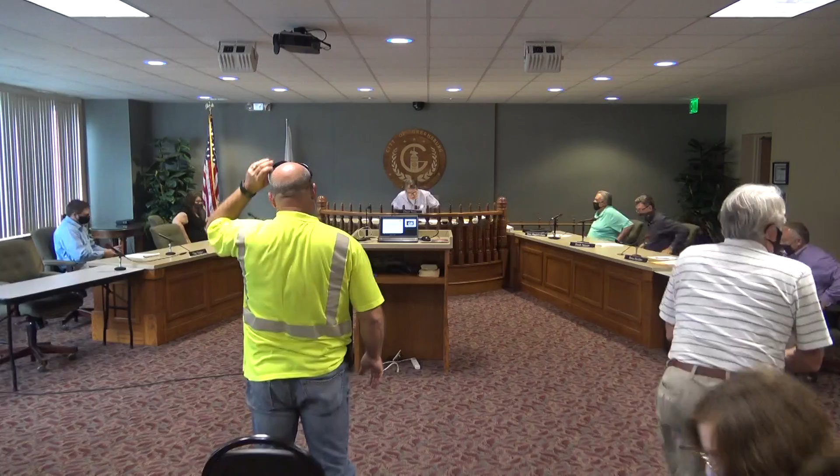I pledge allegiance to the flag of the United States of America and to the republic for which it stands, one nation, under God, indivisible, with liberty and justice for all.

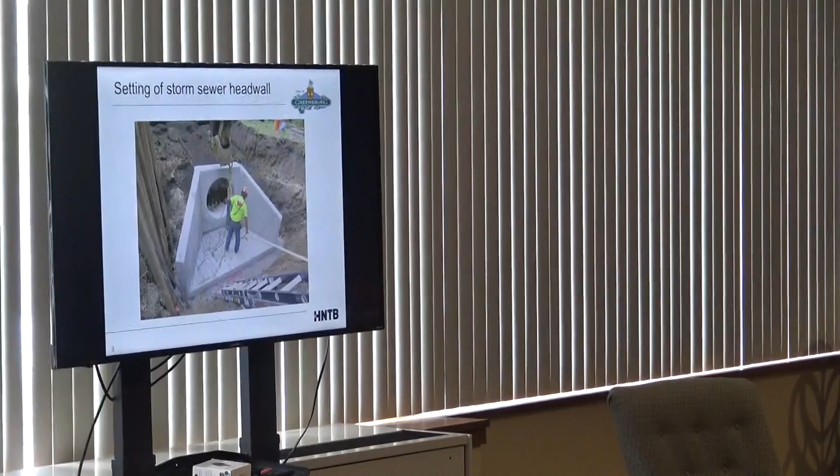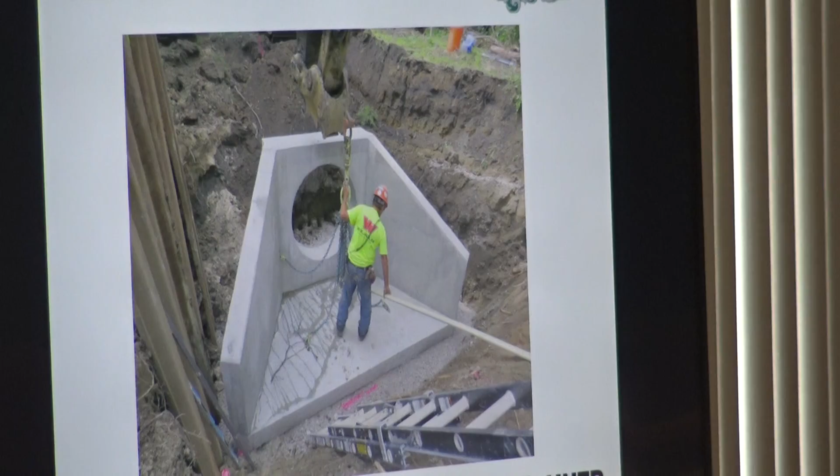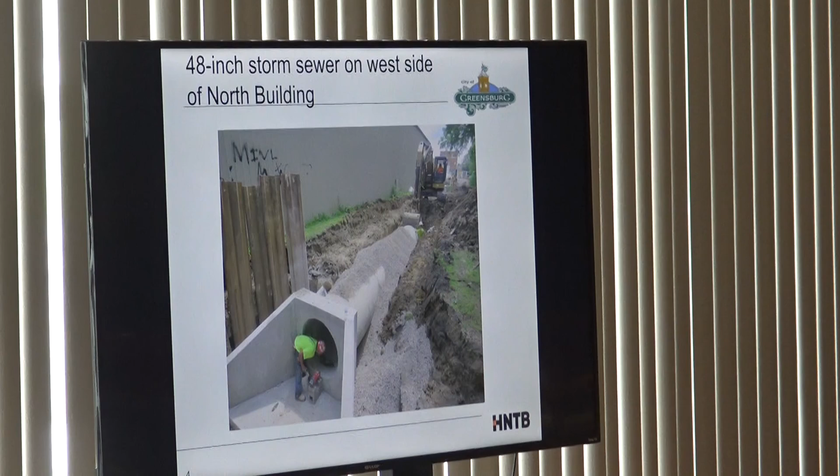Here we are setting the storm sewer head wall on the north side of the north building. You can see to the left some little temporary sheeting they put in to install that. That's a 48-inch sewer they'll be connecting to. Here you can see them laying out that head wall and going south along the west side of the north building.

Here's some more underground piping. This is the air piping connecting the blowers, which are Area 8, to the filters in Area 4. I believe, short of the connections to the water distribution system, this may be one of the last underground process piping jobs they have to do. It's fairly shallow because there's a lot of stuff below it.

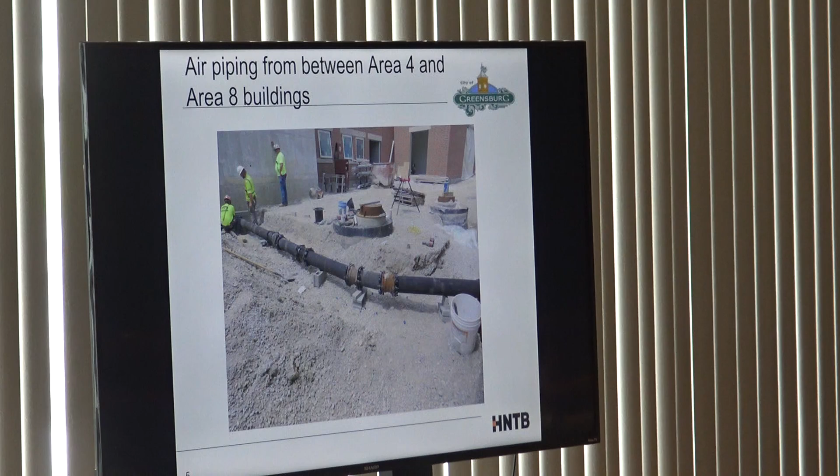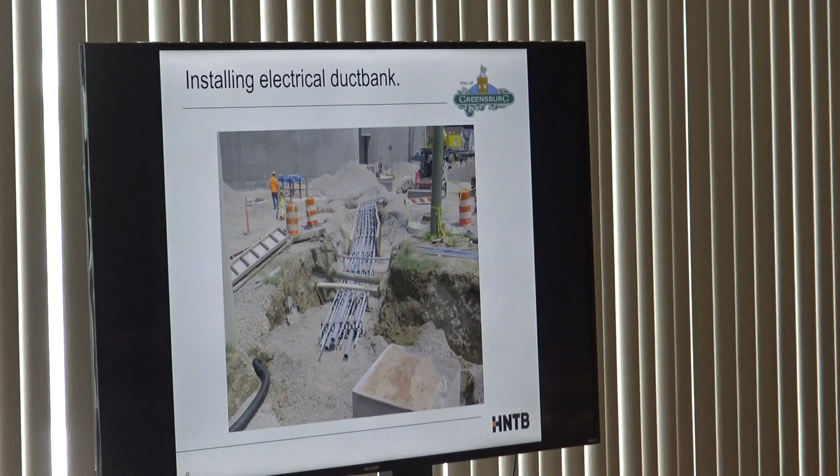Here's another shot of encasing the duct bank with concrete, and you can see the red from a previous pour. They put a dye on top of the concrete while it's still wet, which is kind of a universal signal that if you dig and hit red concrete, you better stop because there's usually an electrical duct bank there.

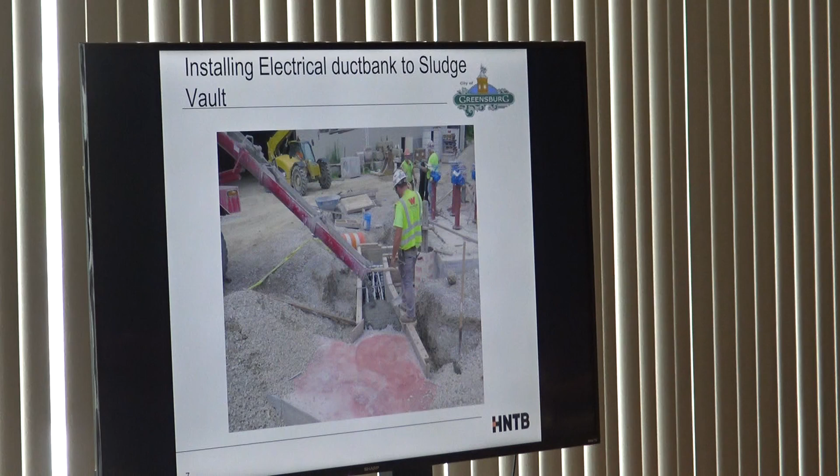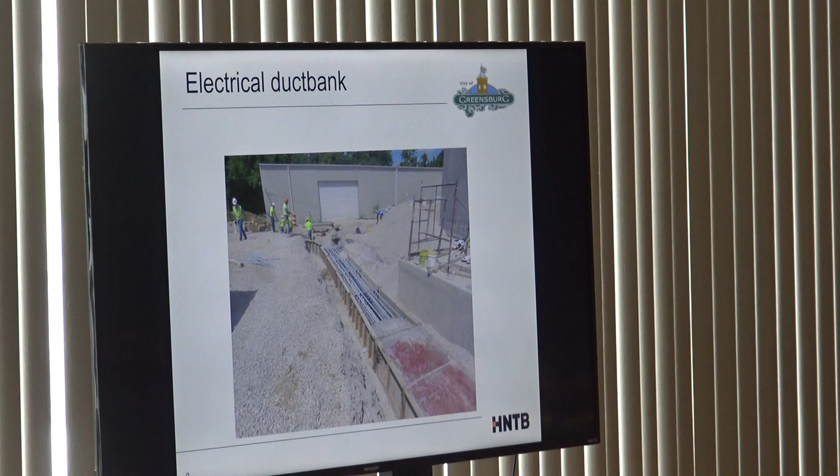Here's another shot of that, heading west toward the north building. The new treatment plant is to the left of this picture, and to the right are the clarifiers. This is actually running down the old 5th Street. And there are the valve actuators, and you can see the 3 protective bollards we put in to protect them.

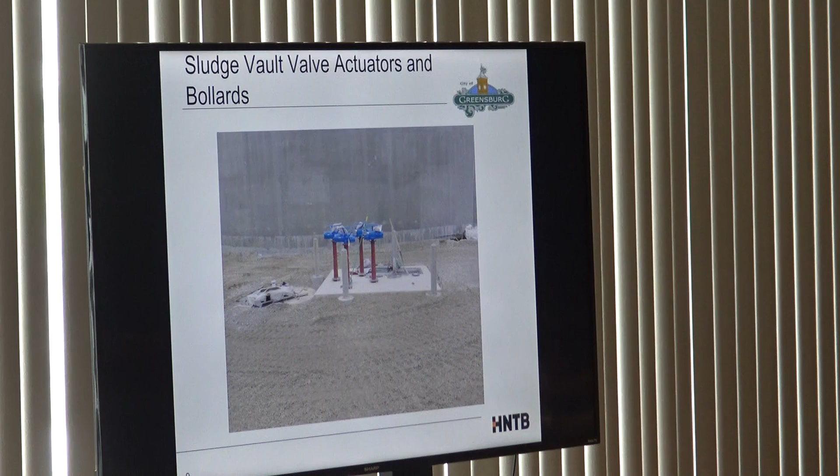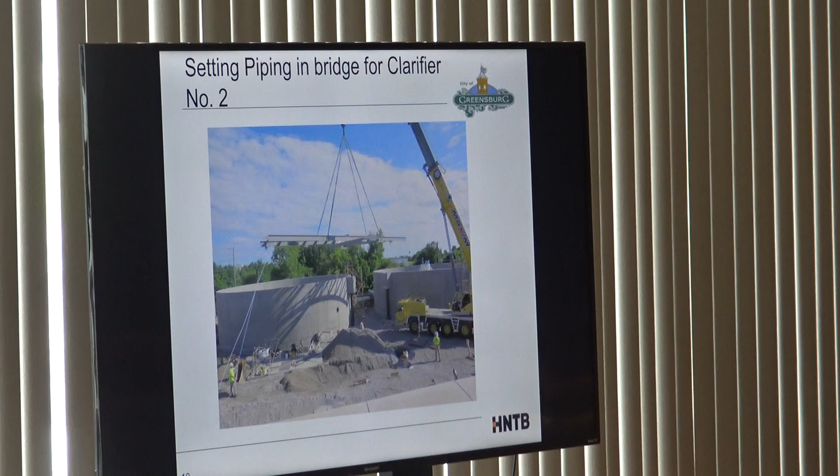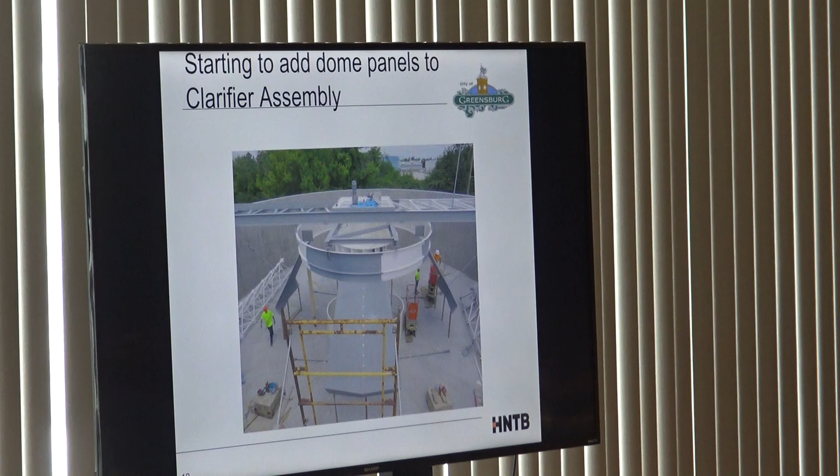Here's part of the clarifier assembly, the center column there, and you can start to see the dome or baffles. One thing to point out is all those get welded in place, and to keep it balanced they basically started at 12 o'clock, then 6, 3, 9, and kept working their way around the face of the clock so it stayed balanced. If you don't do that, I've had experience where somebody didn't, and when they got around to 11 o'clock it did not line up. There you can see the final dome being put in place, looks like they're still welding at this point.

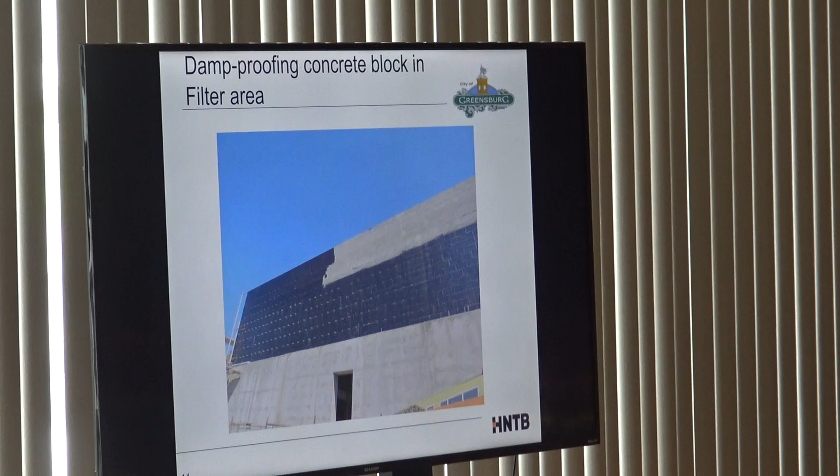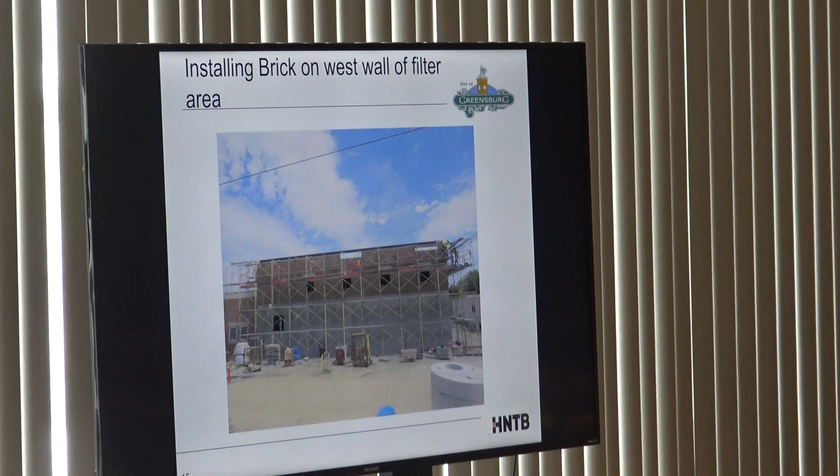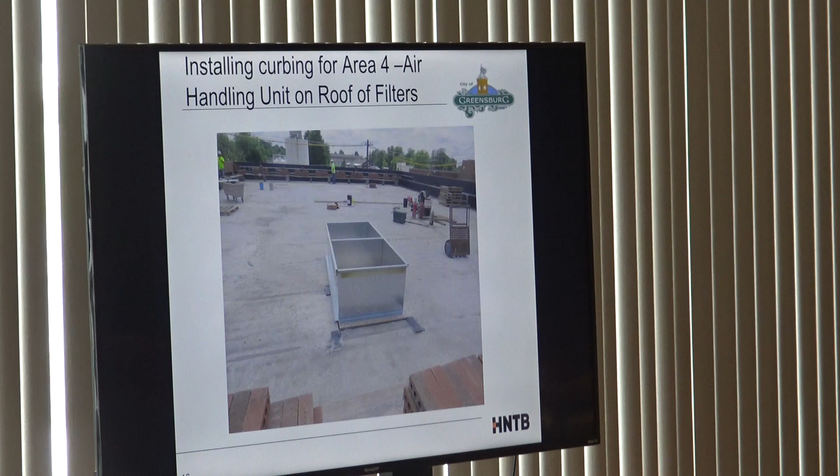Now we're on the roof above the filters. There is the curbing for one of the air handling units, and you can also see the brickwork on the inside of the parapet wall being installed at this point in time. They've since finished that, so the next thing on this roof will be the roofers coming in to start putting down the membrane and insulation and getting that watertight. That'd be good because with these kinds of rains, we still get a lot of water getting inside the building, so it'd be nice once we get that watertight.

Basically, the main power comes into the electrical room in area 8, and then there's a sub feed that comes over to this room in area 4, and everything in area 4 is fed out of this room as well.

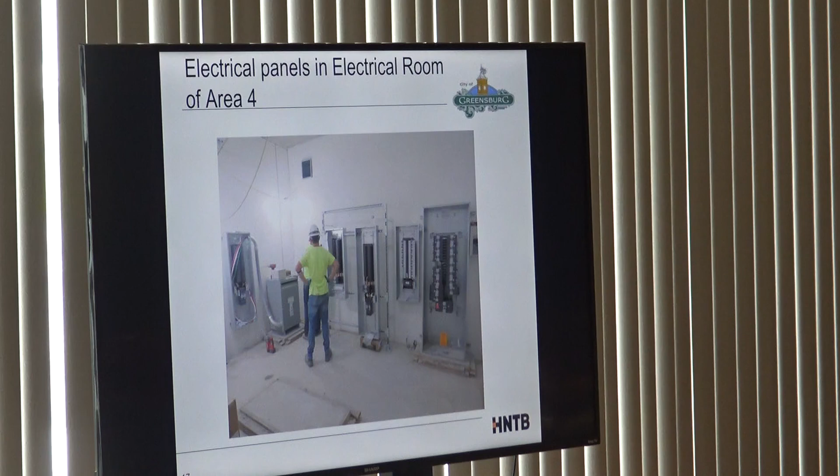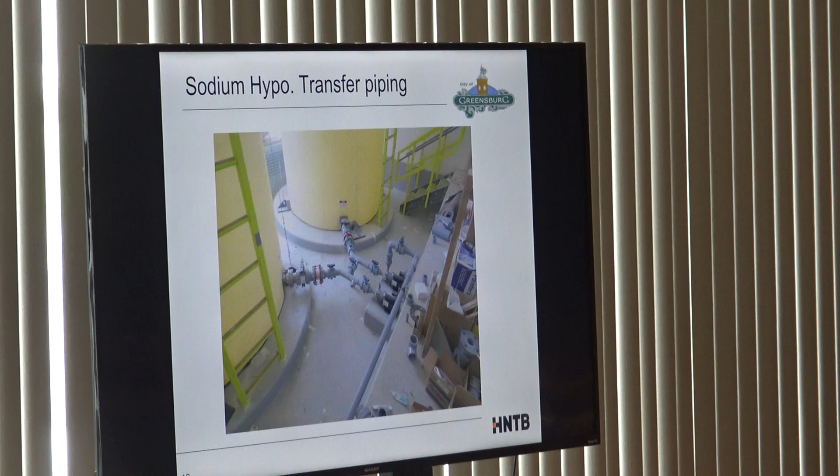Here's some of the piping, transfer pumps down there, which basically transfer the chemical from the bulk storage to the day tank and then onto the metering pumps. There's transfer piping in place there.

Here's some more of that chemical piping as well. We're looking at some strainers and some backflow preventers there. And in the foreground, the black is the metering, one of the metering pump stations.

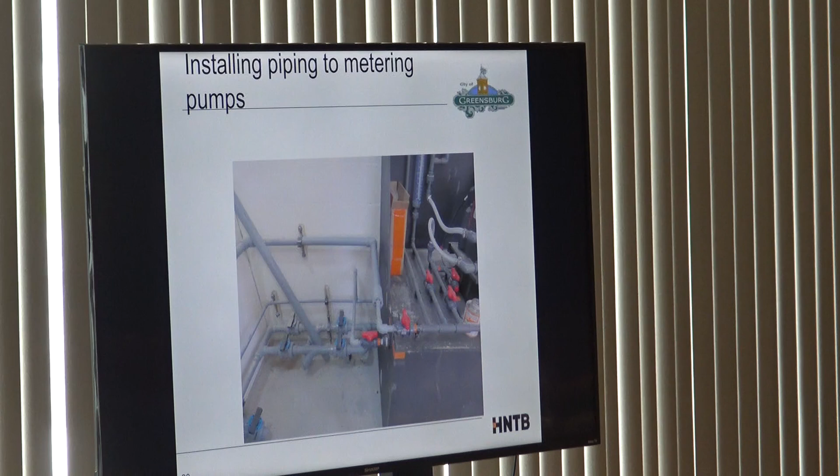One of the other things I forgot to mention earlier, they also poured the concrete stairs to both doors in area 8. So for anybody that's been on the site a lot, that's a welcome relief now - we don't have to climb up a ladder to get to any of those buildings anymore.

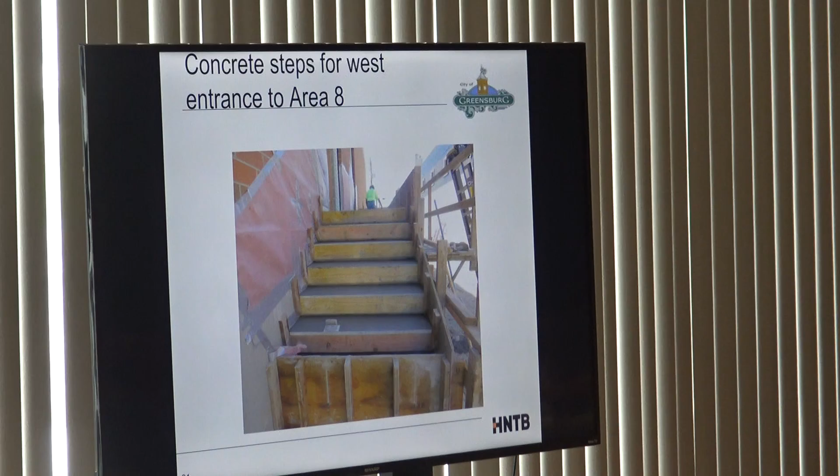So I think that's the last of the main stairs. They still have to set the stairs that go up to the clarifiers, but those aren't concrete, those are metal stairs.

Now we're in the pump room of area 8, and you're looking at the 2 high service pumps there, or the 2 backwash pumps. The painters have been in there painting those - actually, that's what you're doing right there.

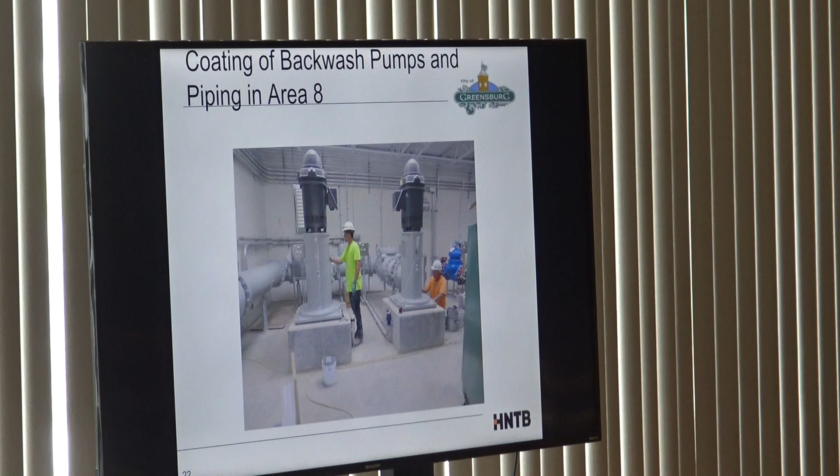The backwash lines get painted gray, and then the finished water lines get painted blue. There's the finished water lines being painted. You also see the electrical conduits in the background - those are all getting painted as well, the same color as the walls. The idea is to have those blend in so you don't see them as much.

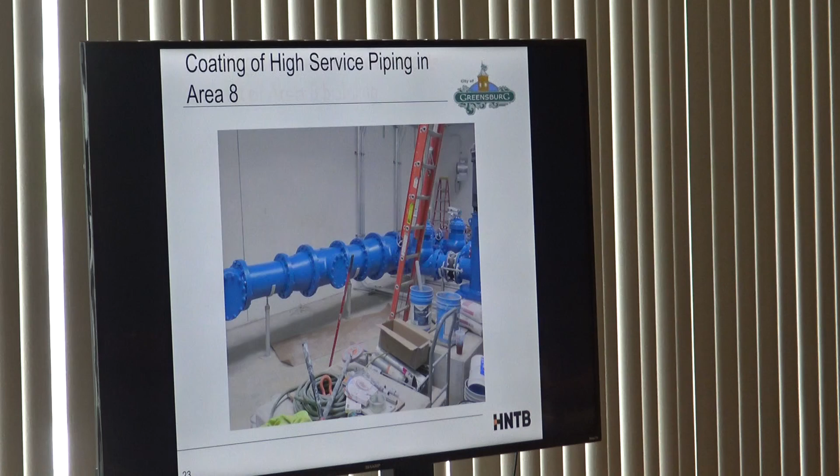Now we're on the outside of building 8, and they got the scuppers and downspouts and the drain lines installed last month as well.

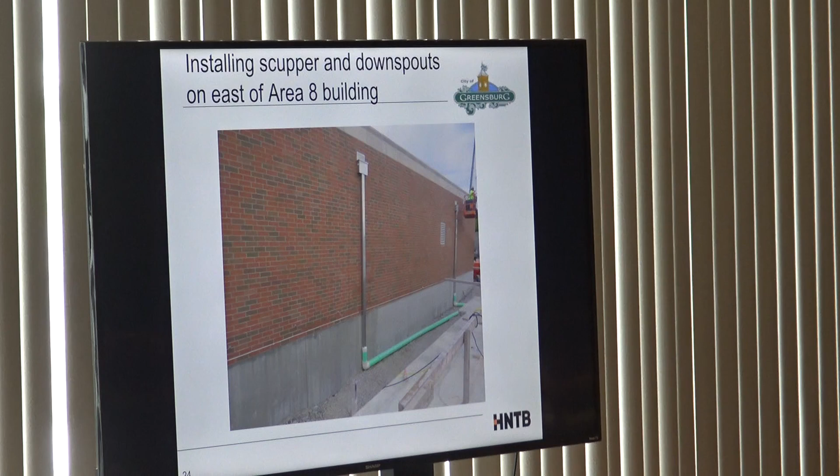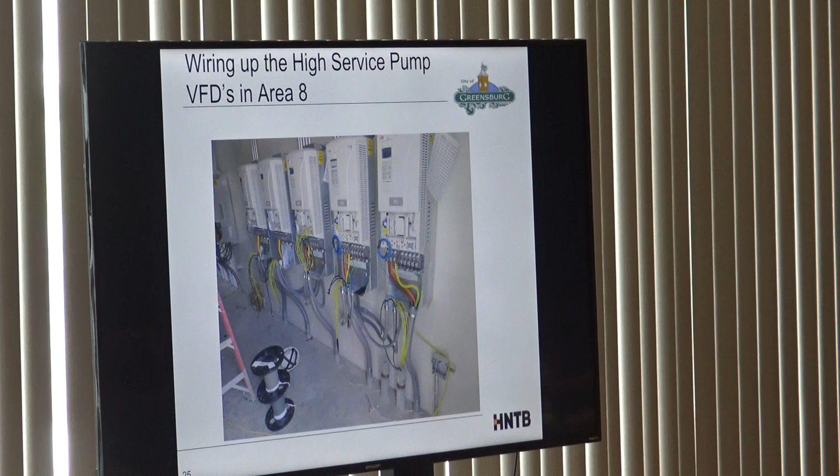Now we're in area 8 again. This is the VFDs that will feed the high service pumps, and the wiring is being landed in each of those VFDs as well.

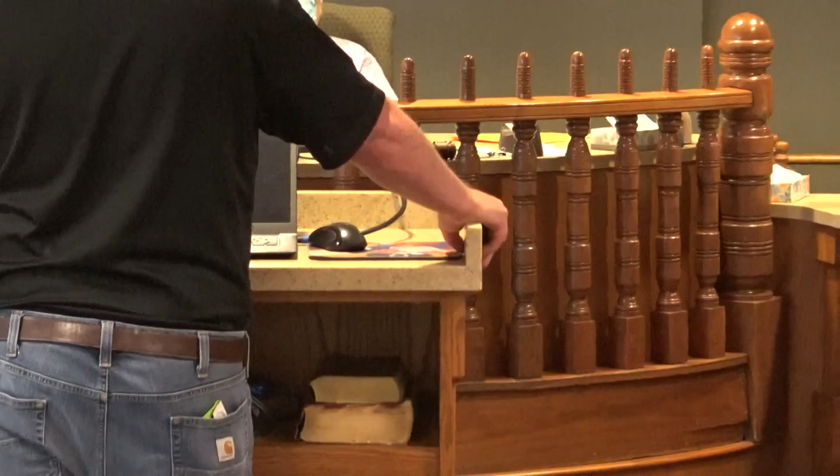That's it. Any questions? How many people will you have there when you start it up? How many will we have there? Yeah, I mean, like Wilhelm and people like that there, or piping people, or you think?

Yeah, basically we reviewed their schedule last month, and they're going to try to simultaneously start up some different equipment. Each piece of equipment, they're required to bring in a manufacturer's rep that understands the equipment better than anybody else. He has to sign off that it's been properly installed and ready for operation, and then he will run through with Rick's guys as well as anybody on site how the piece of equipment operates and runs, and they'll conduct the startup.

So a lot of times, I think most of that equipment has areas for them to be there at least 2 8-hour days to do the startup on the major equipment. They don't always need 8 hours, but they're required to have that much. And I think they also have to come back at least once if something doesn't work like they said, so they have to come back and do that again. So all the equipment will be done that way.

Some of the equipment will have multiple startups, like on the clarifiers. They may not have everything ready for water, but they'll do a kind of torque test to make sure there's nothing binding anything. They'll do that earlier on and then come back and do the final startup and make sure all the scum mechanisms and that sort of thing work. So that can be a multiple stage process.